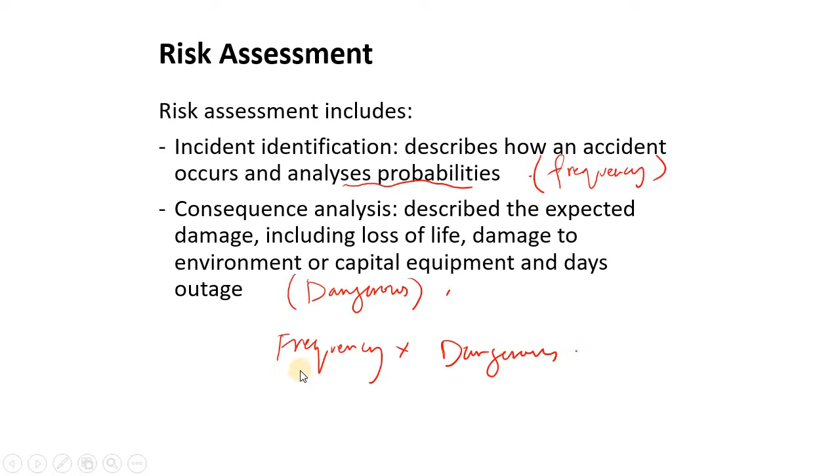It happens every day, and it is very dangerous—that is something severe that we never want. But for example, it happens once every year, but it is very dangerous—of course this will still be a risk, but not as high as if it happens every day. Now if it happens every 10 years and it's very dangerous, that puts the risk really very low because it happens every 10 years. Now if you say it happens every 100 years, forget about it, right?

So the thing is that the frequency will increase the risk if it happens every now and then. So every now and then, if it happens, it's very risky.

What about the dangerous part? It may happen every day, but it is not risky at all—not dangerous at all, which means we maybe don't need a design for that to be inherently safe, but we just deal with it. So I just said it's not that risky, because it's not dangerous at all, even if it happens every day.

Now if it happens every hour, will this be accepted or not? Now if it happens every minute—I know this is crazy, but what I'm trying to say is when I say it's dangerous and I increase the frequency, it becomes dangerous in this case. So this is the risk, where you multiply the frequency by the consequences, how dangerous it is. The frequency tells you how much it happens per certain time.

And if you have a high risk, you will say, for example, it is in category A, where it is unacceptable, then category B, where it is critical, and then serious, marginal, negligible. These categories differ from place to place, so it always depends on what place you're talking about. A university is different from an industry, and different from my shop that sells hamburgers. So everyone has its own different risks.

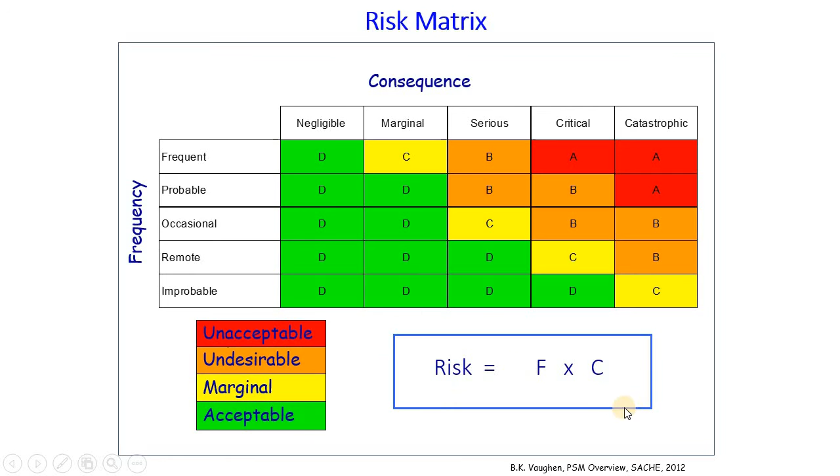We are going to add something. Usually you will not find this in many places, because they consider this as one—they more concentrate on frequency versus consequences. But operational discipline is something you're adding: if you have bad safety precaution, no good management for safety, no procedures, you're putting this down, and this just increases the risk. But if you have good procedures, really very good procedures, to deal with everything you have, right?

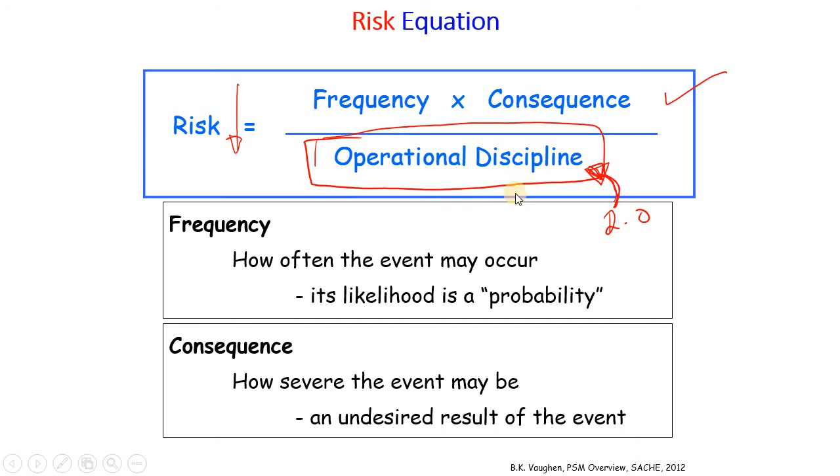So what will happen here is the risk will go down. That is the operation disciplines. How much are you ready for those risks? How much do you have in system, management wise, procedures, and even the instruments, the sensors, the safety precautions, and so on. So what is the operational discipline?

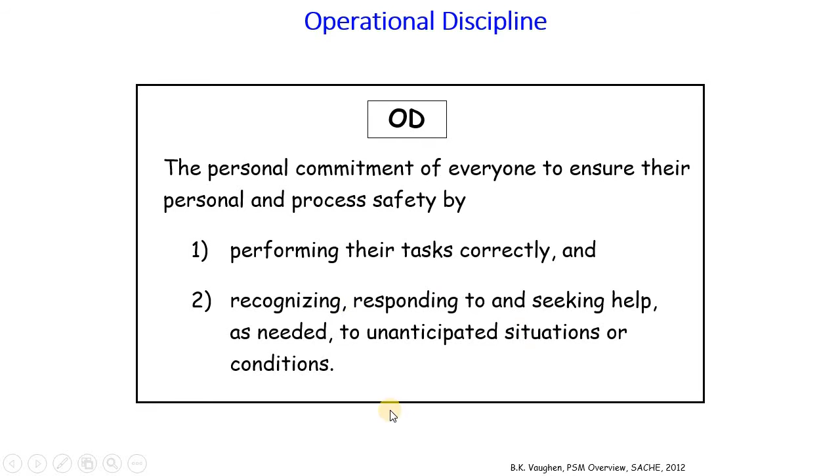The personal commitment of everyone to ensure their personal and process safety by performing their tasks, so everyone knows his task or her task, recognizing and responding to and seeking help for unanticipated situations, so they know what to do when they have some kind of situation or condition. Sometimes operational discipline is also reflected as a leadership focus, employee involvement, practice consistent with procedures, excellent housekeeping, awareness, knowledge, and commitment at the personal level.

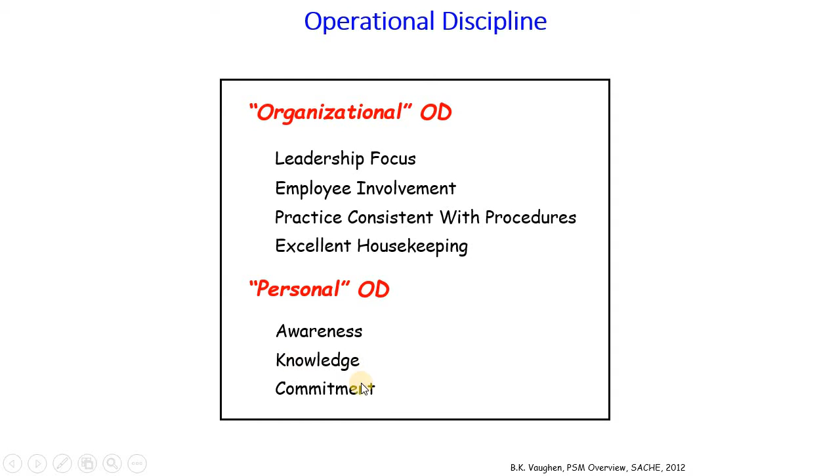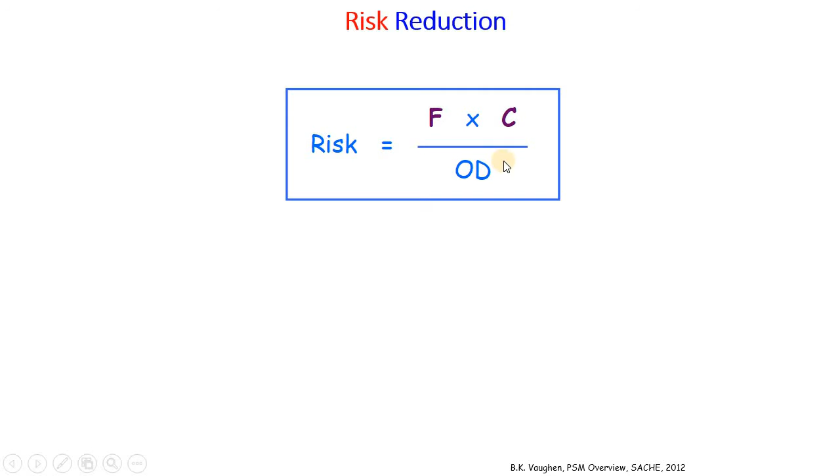So that is at the organization personal level. I think you got an idea about OD. Of course, if you ask me what is the value of OD, always keep it as one, because it's very difficult to identify that. Only if you have in your industry something you can identify, the value of OD is going to be different. We already explained part of that, and this is where I explained that if operational discipline goes low, the risk goes high.

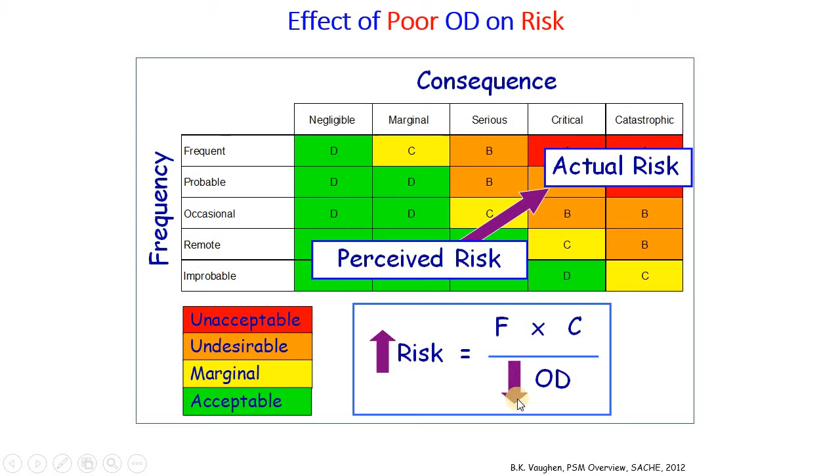So that is the equation, the equation that we have in our PSM, process safety management. They compare the risk reduction efforts and evaluate them against potential business risks. The risks we are talking about here could be environmental, operational, maintenance, quality, and financial. So there are many kinds of risks, not only risks to a person.

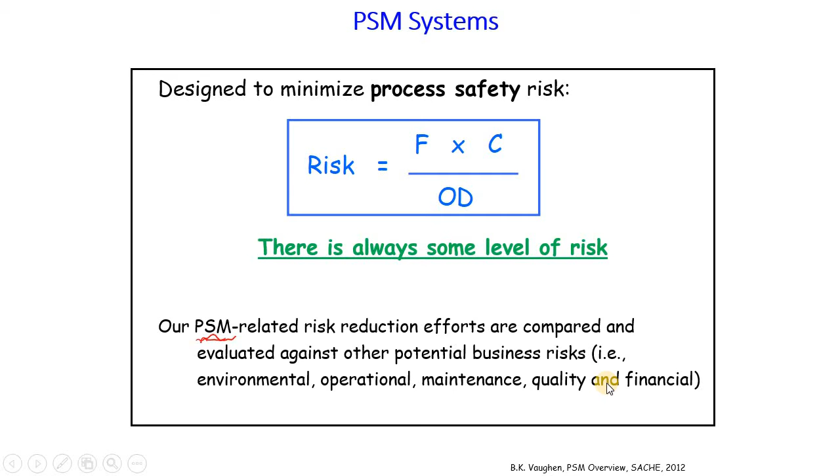And if you go to the process safety management standard and read about it, you're going to see the different risks that are incorporated in that standard. So that was the first part, just to get an idea about what is risk and how to calculate this. Now getting to a different view of it.

What I had explained was something very generic. Well, if you go to industries, there are more detailed definitions in this regard, and one definition used in industry is called reliability. There have been studies, master's studies, that talk about reliability and how reliable an industry is. So you can go to a certain unit in the plant and calculate the reliability. So what is reliability?

It depends on the probability. That's where it concentrates. So what is it? Let me go more into details. Equipment failures or faults in a process occur as a result of a complex interaction of the individual components.

So what I'm talking about is failures. How much does this happen? Does it happen every year? How many equipment failures do I have? For example, I'm talking about valves, how many failures will I have per year for valves. What about compressors? How many failures will I have in my compressors per year?

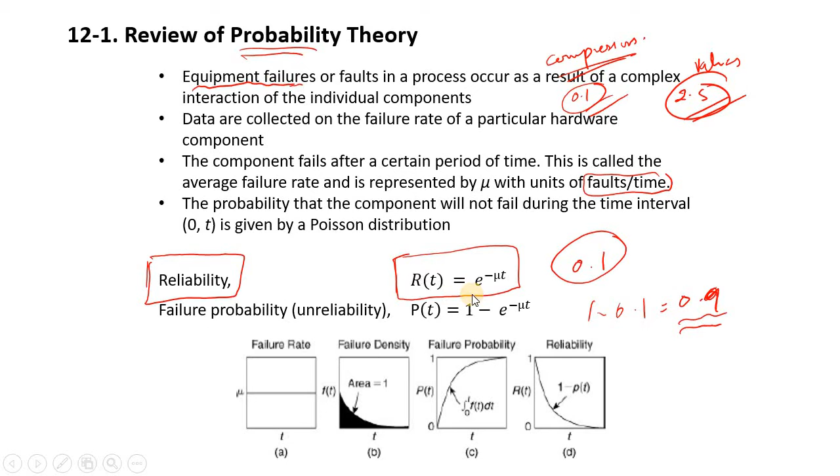So if failure probability is 0.5, that's 50%. That is the meaning of failure probability. Reliability and failure probability are opposites of each other. So this is how we calculate: all we need is mu. We calculate reliability, and from reliability we can calculate the failure probability.

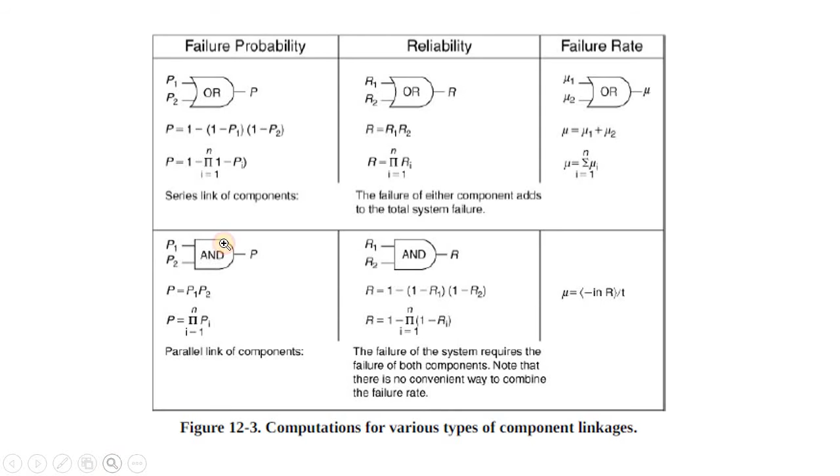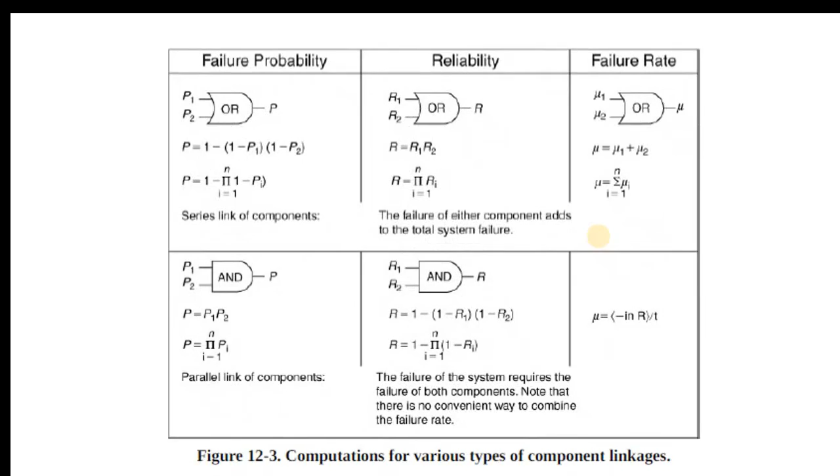Now it can get complex. In this case I'm just showing you the complex cases that we have. This table you always need to keep in front of you, because it's going to be very supportive when you try to solve problems in this chapter. Well, what do we have here?

If we have—this is the failure probability first, which is P, right? This is P, and here's also P. Here's the reliability, which is R, and here's the failure rate, which is mu. So if I start with the failure rate, mu, how many times per year? If I have two failure rates, this could fail, and that could fail as well.

For example, you have two valves redundant to each other. So it could be this and this, or that. And since we have this failure rate, if you have something redundant, you're going to add them. Maybe not redundancy—more than that, you have, for example, a valve, or you have also an alarm system here. So this could fail and this could fail.

Now this or this, they are independent of each other, but the total mu will be mu1 plus mu2. So you add the failure rates that you have.

However, if you have the AND, in which both of them could happen together, they are very much related. There's a different equation in which you can calculate mu, which is minus ln R divided by T.

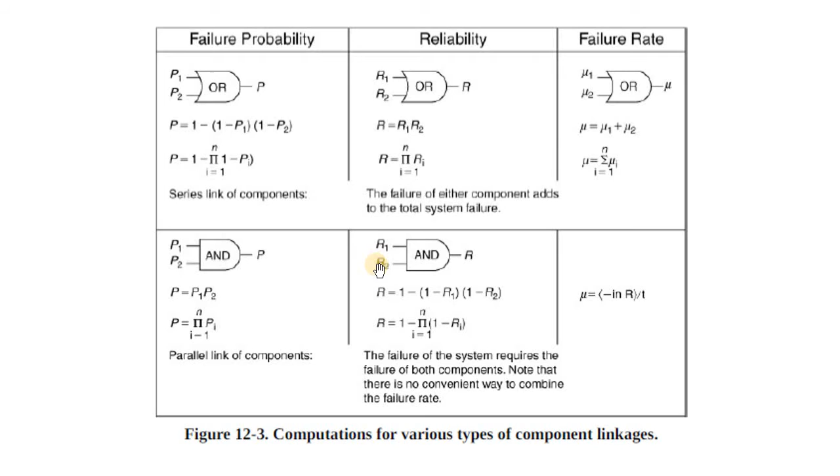I don't know if you recall from probabilities where you add them or multiply them. It all depends if they are dependent or independent of each other. Note that there's no convenient way to combine the failure rate. So what we're trying to say here is that if we have things in series or in parallel, we can calculate the failure rate, the reliability, and the failure probability.

Just to know the values of mu that we have, which are faults per year. So these are how many faults per year we have. Just to get an idea, we need a comparison here.

So control valves is 0.6 faults per year. We are talking about every 2 years you're going to have about 1 fault. For control valves, every 2 years you're going to have 0.6 and 0.6, so that's 1.2 - you're going to have 1. So this is what you're going to say: wow, every 2 years I'm going to have only one fault. Yes, but if you have 1,000 control valves...

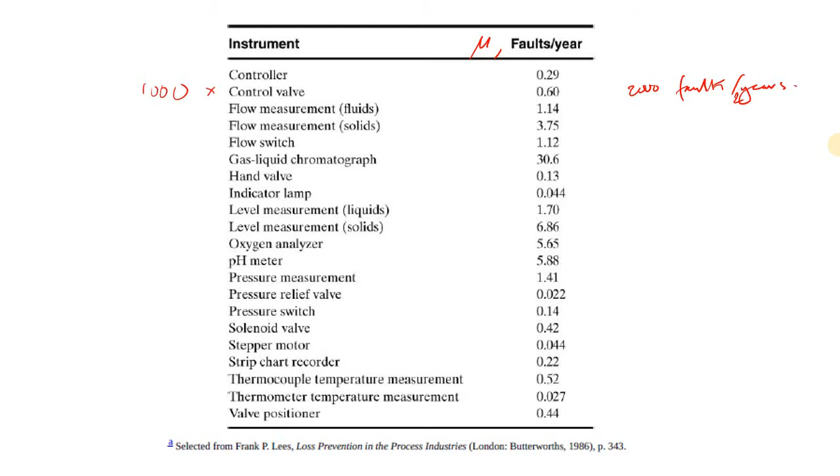Now how many faults are you going to have per year? Oh my God, now I'm going to have 2,000 faults per 2 years, and that is about 1,000 faults per year. So I'm going to have every year 1,000. And now if you think about 1,000 per year, your head is going to click and say oh my God, that's too much. Why is it becoming too much? Because if you think about it per day, divided by 365, you're talking about having a fault in a control valve every day. So this is when you start putting things into numbers, you find out that it may become much more complicated.

Okay, let me get that. So again, sorry for that. So what do we have here? We also want to compare the flow measurements for fluids and flow measurements for solids. If you have a flow of solids, you always have failure much higher than with a fluid. Why? Fluid is much more smooth. This one blocks and causes some problems.

A gas liquid chromatography, we always have - I don't know if you dealt with that, but I dealt with it, and it's crazy. If you have a chromatography at your lab, you see how many faults per year - it's 30.6 faults per year. So you're talking about every 10 days you're having a fault. And that is true, we always have a problem and call the technician. The technician comes - what problem do you have? I just fixed it 1 or 2 weeks ago. It's written there that these are the numbers of faults per year.

We are expecting to get something like that in our life. So they are very important, but they have a lot of faults and so on. There are things which have much fewer faults, like the pressure relief valve, because it is the least in contact with our process, system, or chemicals, and that is why it has the least of it.

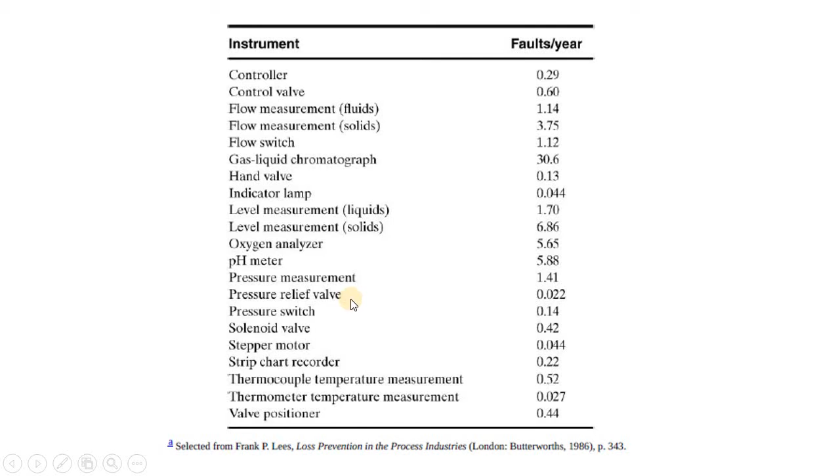Just to take an example, so this is like an example. Both systems demonstrate unrevealed failures. For the alarm system, I just went for the solution. So this is example 12.3. Let's go to example 12.3 and find out the problem.

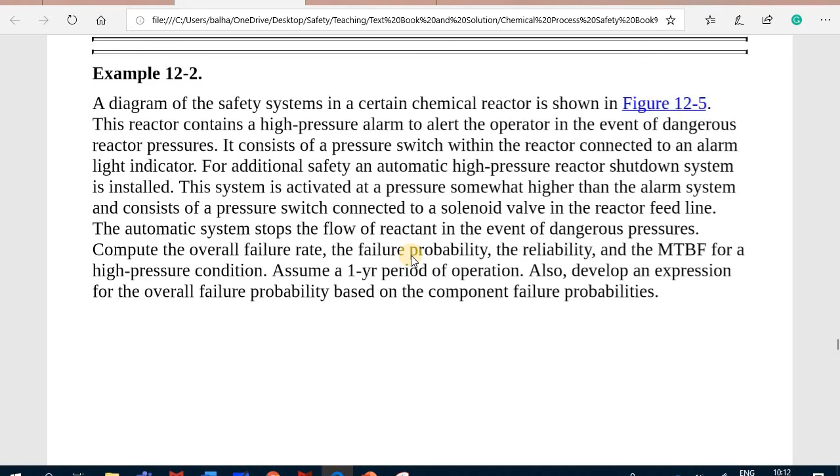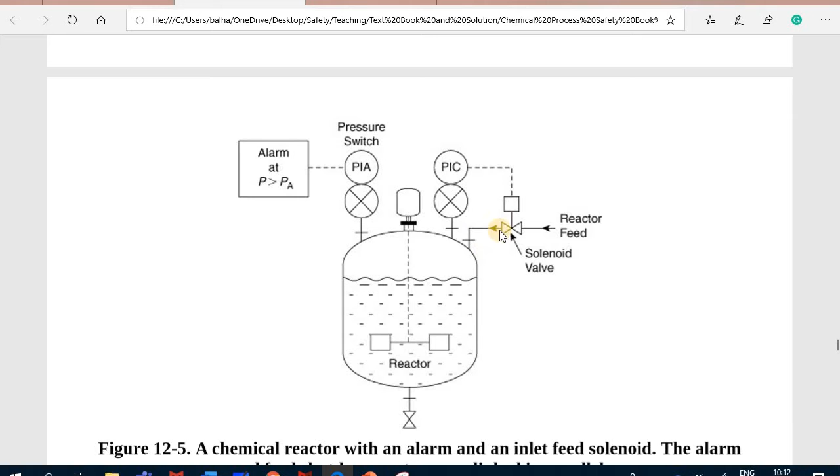But before we get to example 12.3, there's one problem I think is good to solve first, which is example 12.2. In this case, what do we have? We have a diagram, and this is the diagram that we have where it's just a reactor. We have a stirrer, of course a chemical reaction, and we have some kind of a switch here, written A. We have an alarm set at a certain pressure value. We have a pressure controller here, an indicator of course, and a controller, and we have a solenoid valve sitting here. So what is the reliability of the system that we have here?

Okay, so this reactor contains a high pressure alarm to alert the operator if we have any dangerous thing, and of course we have a pressure switch, and as we said, we have an alarm light indicator. On the other side, for additional safety, an automatic high pressure reactor shutdown system is installed.

This system is activated at a pressure somewhere higher than the alarm system and consists of a pressure switch connected to a solenoid valve in the reactor feed line. The automatic system stops the flow of reactant if there's any dangerous pressure.

Compute the overall failure rate, the failure probability, the reliability. So we want mu, then we want P, and then we want R. And then the mean time between failures. We did not take them, but that's simple.

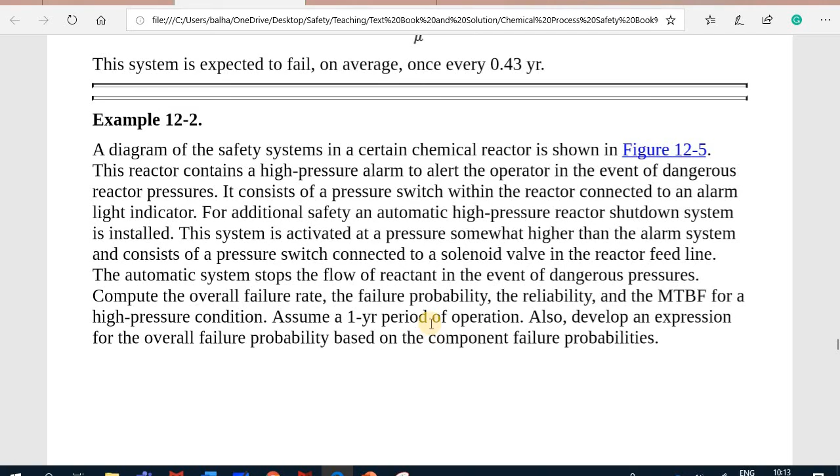We are going to assume, by the problem here, 1 year of operation. So what do we have here? This is what we have. Now we are going to include our switch alarm and the switch for the controller here, and the solenoid valve. So this is what we have: pressure switch 1, alarm indicator, pressure switch 2, solenoid valve.

From the table, we're going to see that for switches, this is the faults per year. For alarms, this is the faults per year. And for solenoid valves, these are the faults per year. So these are the faults.

To calculate the reliability, we just take the exponential term and calculate the reliability of each one. Here you can see which one is more reliable. For example, the alarm indicator is more reliable than the rest because it has less faults per year, less mu. Now if you want to calculate the failure probability, which is the other way of looking at it, we just subtract by 1, and you're going to see the one with the least failure probability. So this is 0.04, giving you the idea that has the least failure probability.

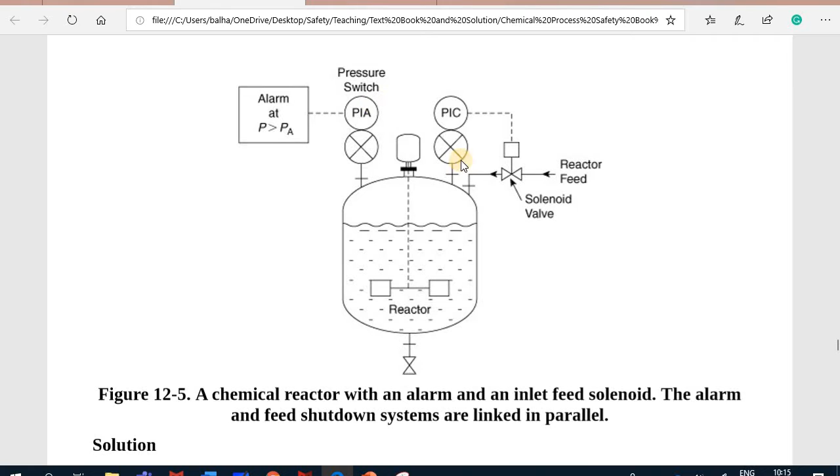Now I want to look at the system as a whole. What is the reliability of that system? What do we have here? You can see that these things are in series, these two are in series, but this is in parallel with that. So these two are parallel.

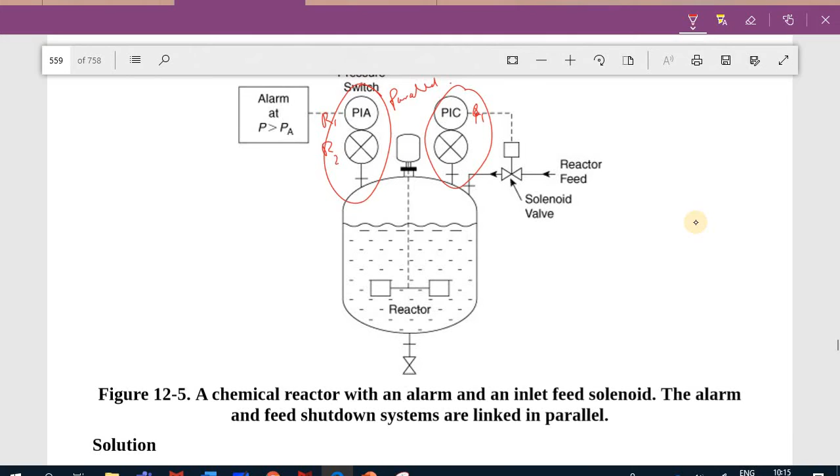In this case, I'm going to calculate the R for each one and then multiply them. After I get the reliability of these two systems here, because they are in parallel, I need to go to the AND/OR system, and this is equal to 1 minus R3 into 1 minus R4. So something like that if they are in parallel.

So this is what we'll try to do. The first thing we are going to start with, because they are in series and it's written here, these two components are in parallel. The two components, I mean on the right and the left. For the alarm system, the components are in series.

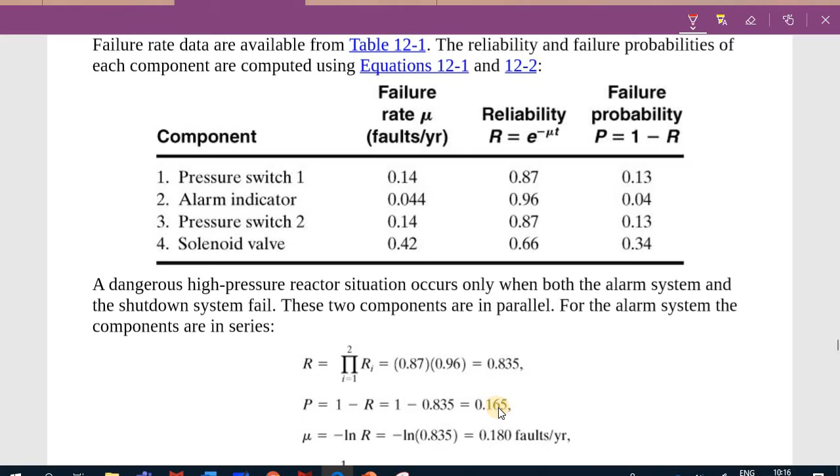So R is equal to 0.87 to 0.96. You multiply 0.87 to 0.96 and you get the value. The failure probability is 1 minus R, that's the answer. And mu is minus ln R. We can calculate how many faults per year for the total, if they are in series. And what is the mean time between failures? You just divide: 1 divided by mu gives you the mean time between failures. So from one failure to another failure, it is 5.56.

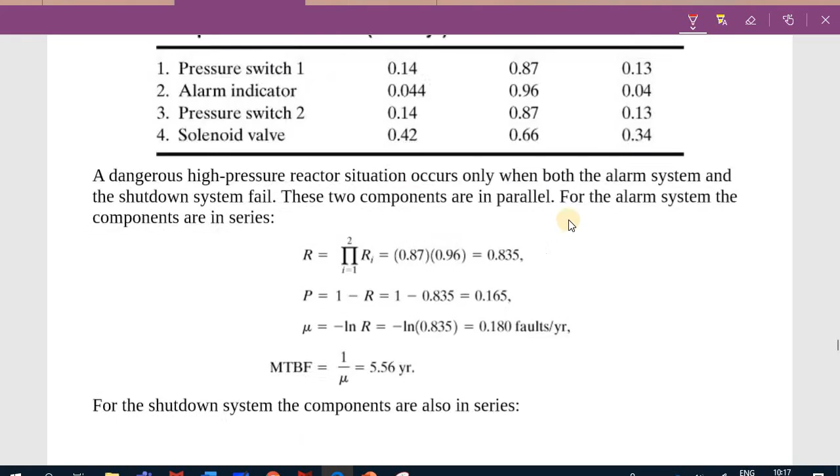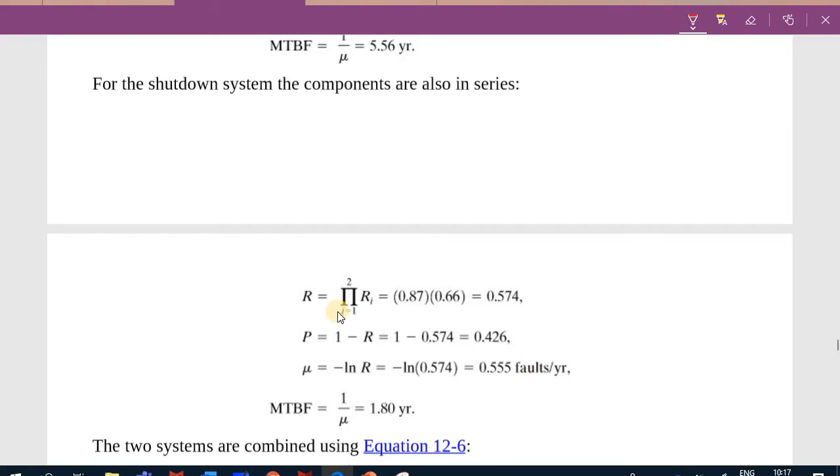Now for the shutdown system, which comes into being if that thing is not working, I mean if it happens that it could not withstand what is happening. Again we multiply them, they are in series, the solenoid valve and the pressure switch. So you multiply 0.87 into 0.66, then subtract from 1 to get the failure probability, and get mu, which is minus ln R because they're in series, and you get the mean time between failures.

Now the two systems are in parallel. So we're going to go to the P part because it's easier, and we just multiply them because they are in parallel, and we get 0.07. By that we can calculate the reliability, which is 0.93, and you can see that is really good - 0.93 reliability is really good. If you want to calculate the failure rate, which is minus ln R, in the case that they are in parallel, you're going to get 0.073 faults per year.

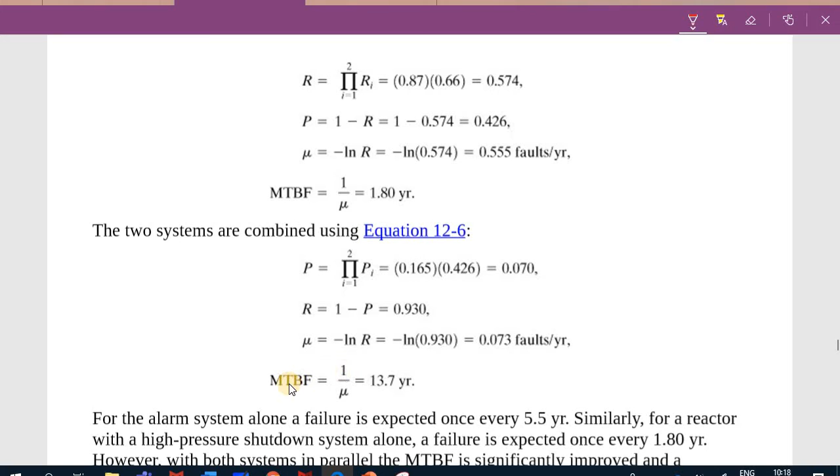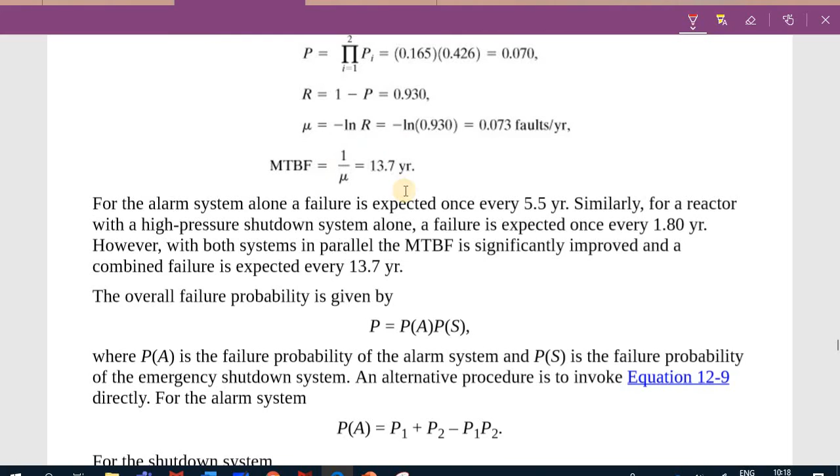I can't understand this in years, so I need to calculate the mean time between failures, and I get 13.7 years. Now I understand that one fault will happen every 13.7 years. It's beautiful to look at, and it's nice to calculate these numbers. It gives you more confidence in terms of numbers that things will happen or will not happen.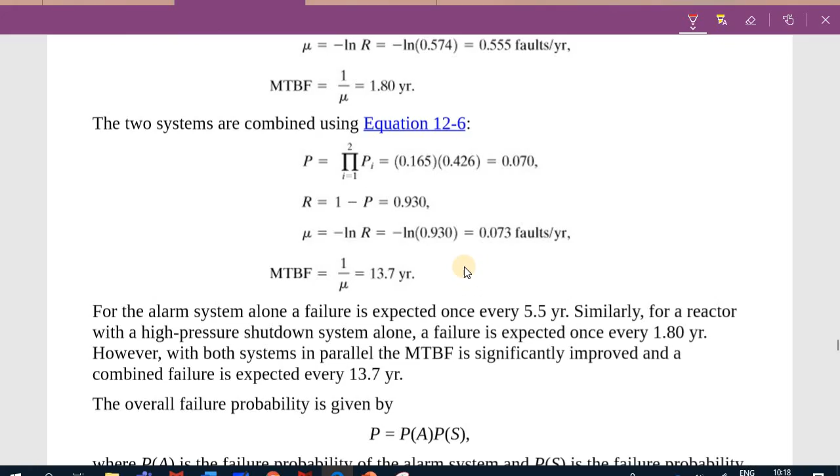Okay, so that was 12.3. I saw that was 12.2. Now going down to 12.3. There are more equations here, but I did not take these, don't worry about them now. Was it 12.3? I think I solved 12.2. That was what meant to be then. I just solved 12.2, which is the example we wanted to solve, because this other part that I will not cover talks about availability and unavailability for both the alarm and the shutdown system. There's something called availability and unavailability, but I did not take that, just to keep things easier for you. I decided I will not cover that. So here I think we meant example 12.2 rather than example 12.1.

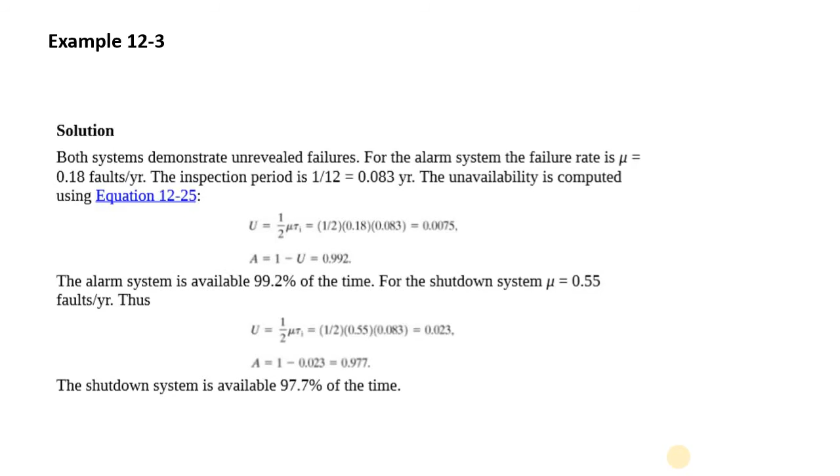So going to the next section, after knowing the failures and probabilities, we have the event tree. It's another way to know where we have high risk and where we have a high frequency of what you're trying to see. The way we see event trees, it comes from the words 'tree' and 'events' - there's an event, but it's like one event is a consequence of another event. So it's a series of events, one event after another.

Event trees begin with an initiating event, which starts everything, and then it works towards a final result. You can also go backwards - if you have the final result, you go back to the initiating event. Imagine you do this by hand and you already know what final result you will achieve if you have the event trees of many initiating events. So it's something you do as an assessment to assess where your risks are. This approach is inductive, so you do it beforehand.

The method provides information on how a failure can occur and the probability of occurrence. We want to know how a failure can occur by knowing the events of that. So the typical steps of any event tree analysis: identify the event, what is the initiating event, where it starts. Then, what are the safety functions? We identify them, designed to deal with this event. We construct the event tree, and then we describe the resulting accident event sequences - what are the accidents that could happen?

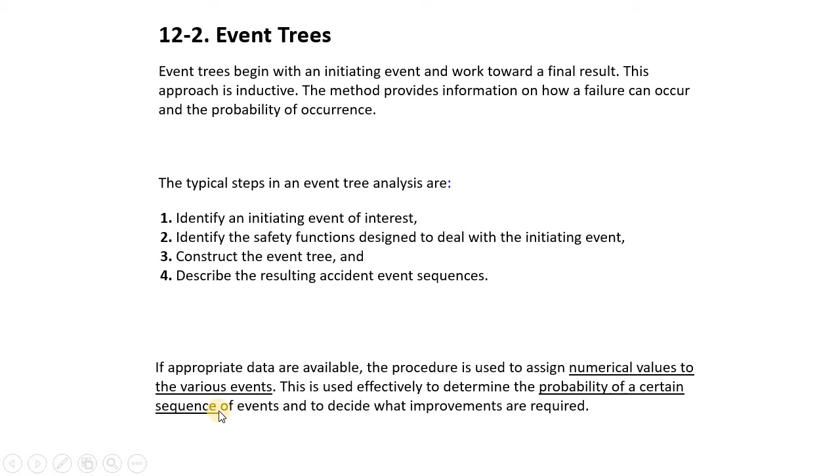So what do we need? If we have data, the procedure is used to assign numerical values to the events. You put numerical values, and we're going to see that in a moment. This is used effectively to determine the probability of a certain sequence of events. So an example here, we directly go to an example, 12.8.

So that is the example we have here, 12.8. We already know this example, we've gone through it many times. A reactor, we have cooling, and water going outside. In this case, what do we have? We have a temperature controller, and it has an alarm as well. We have a temperature controller to make sure that if your temperature goes up because of the exothermic reaction, you're going to have more cooling water in. So what do we have? A high temperature alarm has been installed to warn the operator of high temperature within the reactor.

The event tree, now we want to start with the initiating event. The event tree for a loss of coolant initiating event is shown in figure 12.9. So we have no cooling for some reason. Four safety functions are identified, written across the top of the sheet. Here it explains what is happening. The first safety function is the high temperature alarm, because the temperature is going up.

The second safety function is the operator noticing that there is a high temperature alarm. The third safety function is the operator re-establishing the coolant flow - he's correcting the problem, so the operator is taking action. The final step is the operator performing an emergency shutdown. This is in case things did not go well, so the operator is taking another safety precaution, putting it in shutdown.

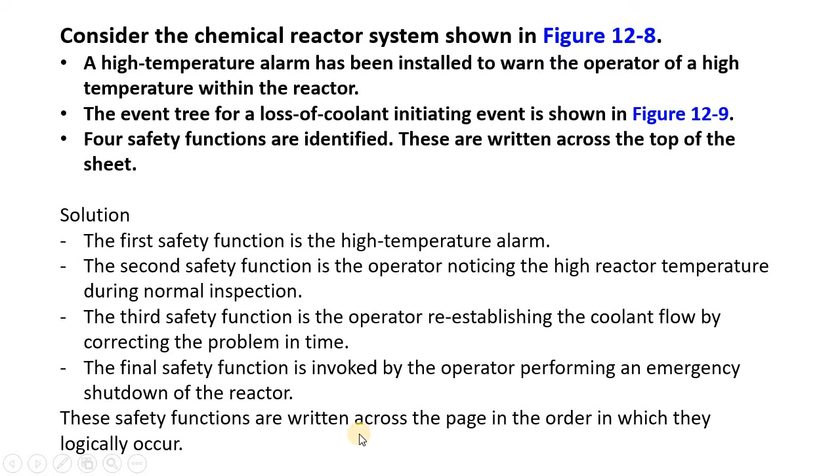So these are 4 safety steps that could be taken. When I know the 4 steps, I need to know the probabilities of those steps. So here are the probabilities. I'm going to calculate the failure rates, or the occurrence rates, and it's written here.

The event tree can use quantitative data available on the failure rates of the safety functions. So we need to know the failure rate. We can also know the occurrence rate, and know the opposite of that, which is the failure rate.

For example, a loss of cooling event occurs, and there are 4 steps. The first step, where the hardware safety function, which is the alarm, fails 1%. So we are going to assume that it fails only 1%. Sometimes we already know the failure rate, which maybe is 0.04. But in this case, we are going to say that the possibility that this alarm will fail, telling us that they have a high temperature, is 0.01.

Now we go to the second part. So assume the operator will take action. But how many times will he take action if there is an alarm? We are assuming that in every 4 times he takes action 3 times. So one time he just misses that out. 3 out of 4 he's going to be taking action, and this sounds good, because above 70% usually the operator is attentive. More than 90%, this is usually not applicable.

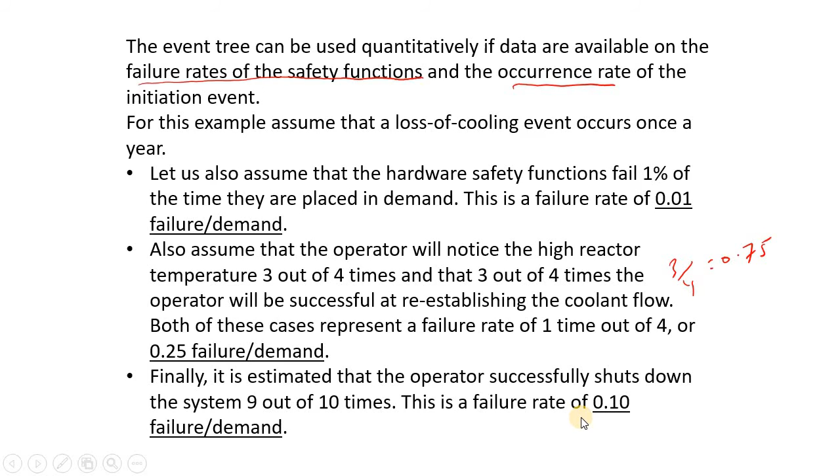So what do we have here? Let's go and look into the details of it. That is the tree diagram. So what do we have? We have a high temperature alarm alert operator. We already said that this is 0.01, if you can recall. It was 1%, that alarm will only fail 1%.

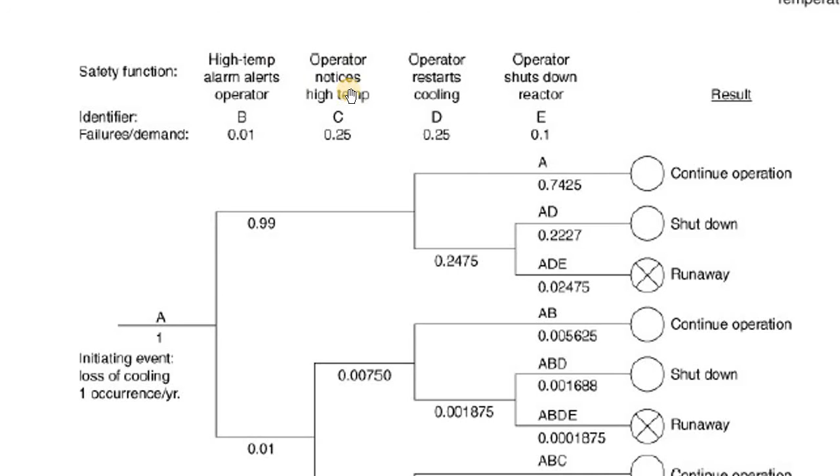The operator will notice the high temperature, 25% failure. The operator restarts the cooling and fixes the cooling rate, 25% failure, which is 3 out of 4. Shuts down, 90% good, but 10% failure. Or you could call it that it will not occur, he's not going to do that.

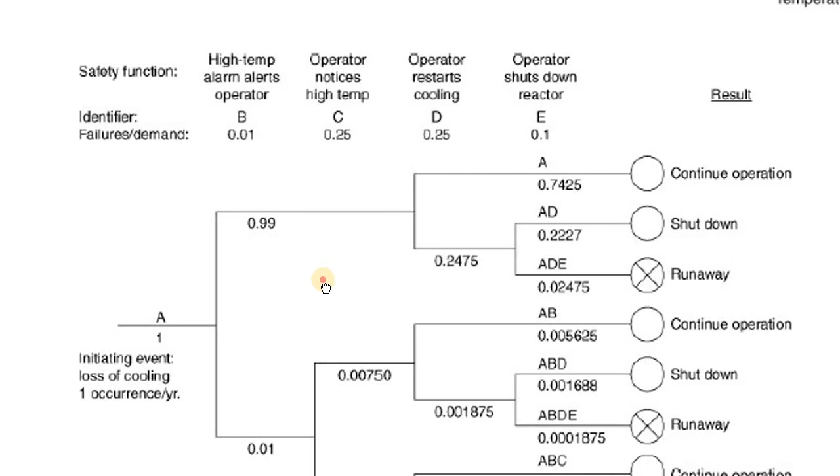So we have 0.01, 0.25, 0.25, 0.1. So what do we have here? We have an initiating event, which is the loss of cooling, which is once per year. What will happen if we have loss of cooling?

So we are going to start with this, saying that we have a high alarm operation here, which is 0.99 and 0.01. 1% it will fail, and 0.99 that it will not fail, meaning that the top line is the success one, the bottom line is the failure one. If you continue, this is the success, this is the failure. If you go here, this is the success, this is the failure. We have success, we need to stop here for failure, but this doesn't count because things are in success, so there is no shutdown, it will go just straight on.

So there's no safety precaution here. But in this case, there's a possibility that if he restarts cooling, this could fail, and if it fails, it goes like that.

The A, D, E are labeled this way: A is initiating, D is not cooling, and E is shutdown. So this ADE event is A, D. This is D, it starts from here, and E starts that way. So that is the A, D, E.

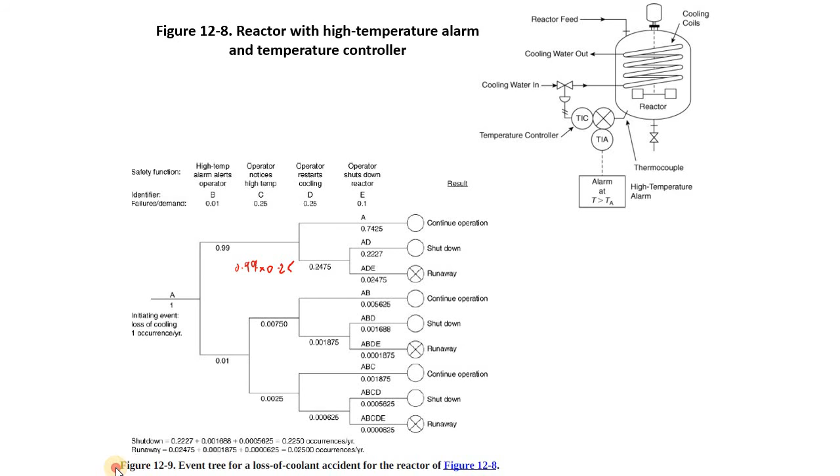So that number we have is 0.99. So this is 0.99 multiplied by 0.25. Let's zoom in. So that is 0.99 to 0.25, which is 0.2475. The rest is the success, where you continue operation.

Now, if the operator restarts the cooling and still things fail, that means you need to multiply it by 0.1, so it becomes 0.02475. And the rest, which is 0.2475 minus this number, is 0.2227, where it goes to shutdown.

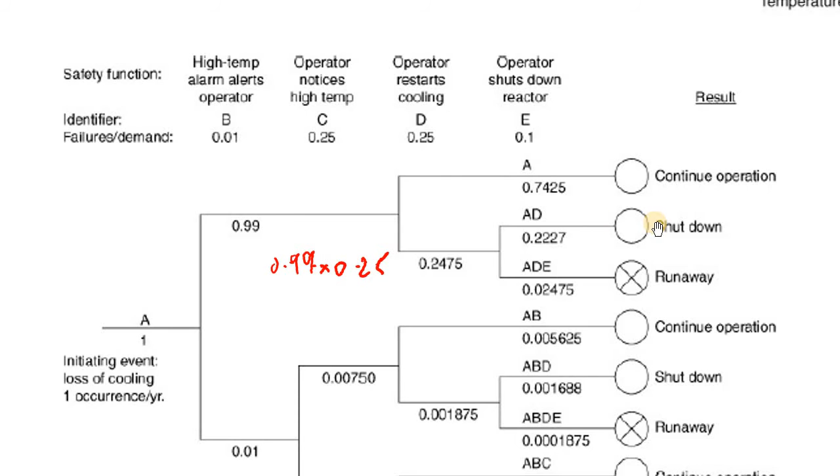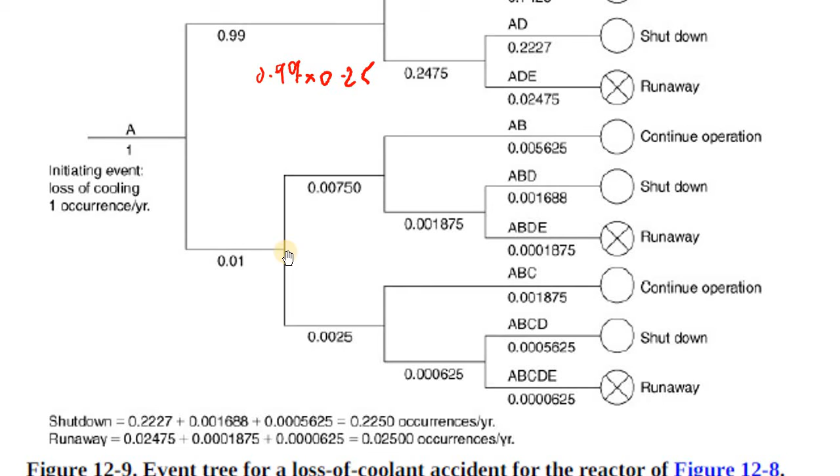So let's take something else, where this is the initial thing: if the alarm fails, it's 0.01. Now if it fails, what if the operator does not notice the high temperature? So as another failure, it's 0.25, this 0.25 multiplied by 0.01 gives you 0.0025. If the operator also fails to restart the cooling, you're talking about 0.25 multiplied by 0.0025, you get 0.000625.

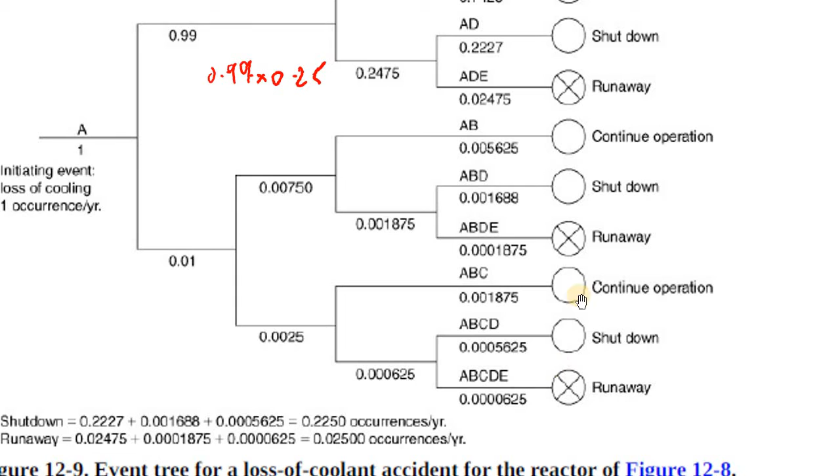Now, if the operator also fails to shut down, this is like impossible, right? And this is why you have a very low number. So you multiply the failure, which is 0.1 here, into this 0.000625, you get this number here. Of course, if it fails, things are bad, so this X means that this is bad, and this is like a success, which is just without an X.

Now, if I want to calculate all the shutdown numbers, the shutdown here and here, we will see that the probability of having shutdowns is 0.225 occurrences per year. So every 4 years I'm going to have one shutdown, and that is the usual case if you think of it in real life.

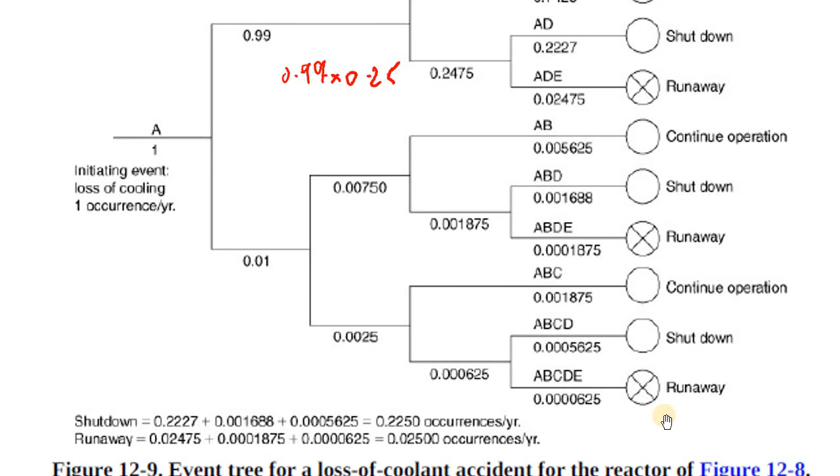Okay, and 100 years is only 2 times. Do you imagine that 100 years? It's more than the life operation of that plant. You already have a shutdown as well. So you can already see that we are saying it will never go to runaway.

That was the way of how to do your event trees. I know it was a little confusing because you have a lot of numbers here and there. There are some assumptions that we also need to include in our problem, and this is what sometimes makes you think this is difficult. It's not difficult, you need to understand the process.

But talking about the numbers, how many faults per year, what are the assumptions, consider going back to your experience when you go to the industry, or it will be given to you if you're a student, so you're going to have these numbers. Things that are very obvious, which you can get from tables for alarms, for valves, this may not be given to you because you can get them from the tables. I know they're not really much related because they are faults per year in the table, but you still can use them.

Fault trees, so now we are going to go to fault trees. It is more like an inductive method, rather not, a deductive method. So you're not getting into something and seeing what is happening. Fault trees actually came from the aerospace industry, where it was used very extensively by the nuclear power industry to qualify and quantify the hazards and risks associated with nuclear power plants.

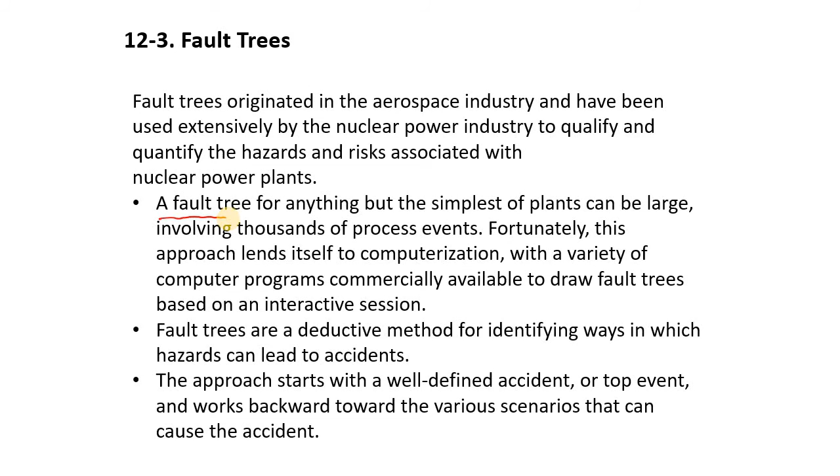A fault tree for anything but the simplest of plants can be really large. So we are saying a fault tree is a very large thing. Even for the simplest plants it's still very large, because it will have thousands of events, and because of that we use computers to do that. So we cannot really do it by hand. It's just a learning process where you do it by hand, but things are then put into the computer because there are a lot of numbers and probabilities. It's very confusing, and you're going to have a lot of human error doing that, and it takes just a lot of time.

So fault trees are deductive, for identifying ways in which hazards can lead to accidents. Now we are not going through the series or sequence of events, we are talking about expecting what the accidents are. I'm going the other way around, sorry. It's more deductive, how the hazards can lead to the accidents, okay, and then I can go backward. This approach starts with a well-defined accident or top event and works backward towards the scenario.

It's something like the what-if, but not quite, because what-if asks what if the pressure goes up. No, it's like this: the temperature in the reactor, the reaction in the reactor runs away. We have a runaway reaction. Why? Then you put the reasons, and for each reason you ask why again, and you get more reasons for every part. The runaway reaction happens because you have a runaway reaction in this system. Why? Because the cooling stopped. The cooling stopped maybe because the pump is not working. The pump is not working because of, and so on. So you can see the way we are trying to look at things.

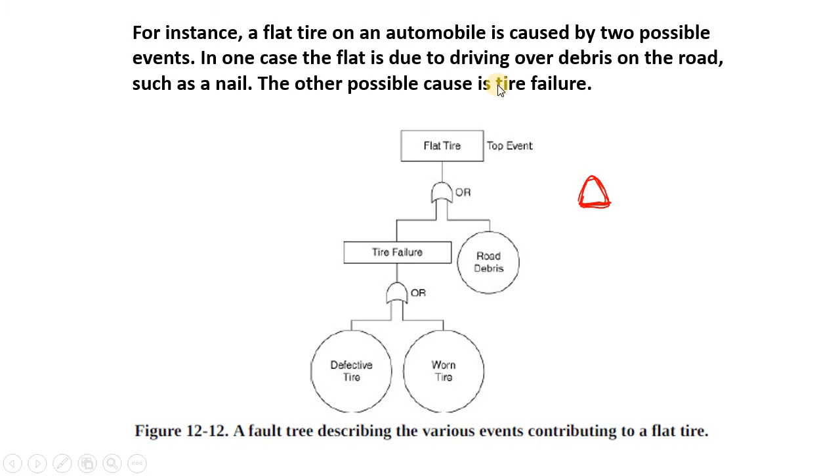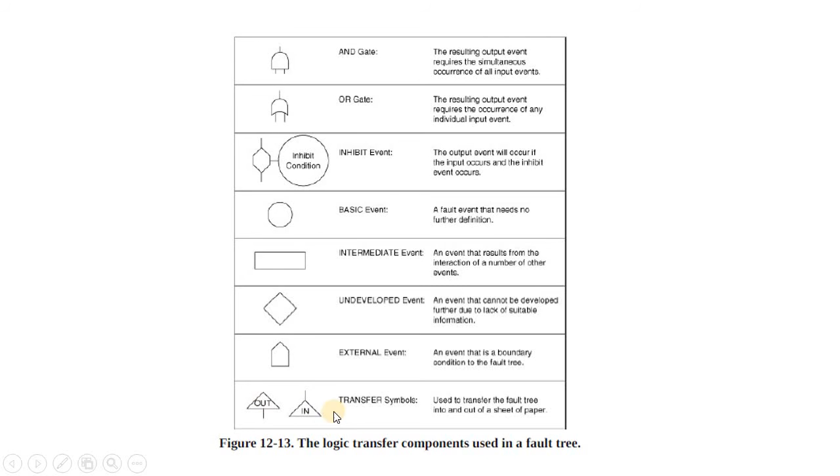Sometimes you have external events coming into being. That is an event that is a boundary condition to the fault tree. And sometimes you need to go to another paper because you don't have space on your paper, so you put these kind of connections for yourself. And that was the way of the fault tree.

There are lots of calculations in fault tree. We are not going to go into the details of the fault tree because it needs a computer to solve, and it's very, very confusing. But we need to understand how to build those fault trees. So not towards the numbers, but we need to go through the concept.

So for example, before the actual fault tree is drawn, there are a number of steps we need to do. Okay, so what are the things that we need to do before we draw it? First, we need to define very clearly what is the top event. The top event is the flat tire, or for example, high reactor temperature, or the liquid is too high. So that is the first thing, or the explosion of the reactor, fire in a process.

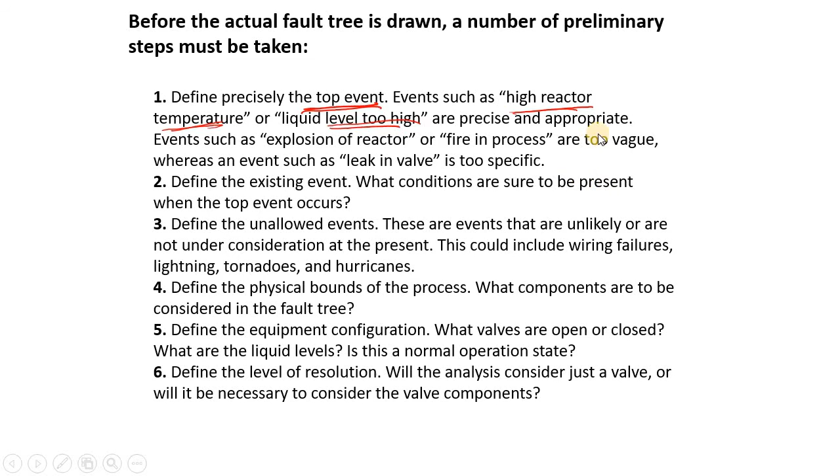But explosion of reactor, fire in process are usually too vague. So it's not very specific, because there are a huge number of detailed events that I should mention for why this reaction, the explosion of the reactor, happened.

Okay, so the second step, after knowing what's the top event, we define the existing event. So what conditions are sure to be present when the top event occurs? Okay, so for this to happen, what should have happened? Why did it happen? And then we define the unallowed events, so things that we are expecting or we don't expect. But the existing events, we are going to include them.

But sometimes we don't want to include them, so we write them on the side. What are the unallowed events? For example, events that are unlikely or not under consideration at present - things like wiring failures. You don't want to mention wiring failures because that could be like hundreds of reasons that take us nowhere. Or lightning, tornadoes, hurricanes - these things are crazy if you try to include them.

This could have happened - now you're studying. It's not that it had happened. Okay, you're studying why the high reactor temperature went high, because we would expect that we will have a tornado one day. So it's like you're saying that one of the reasons we could have a tornado - why could we have a tornado? Oh my God, because I don't know what. So imagine if you go through these details, it doesn't work through fault tree analysis.

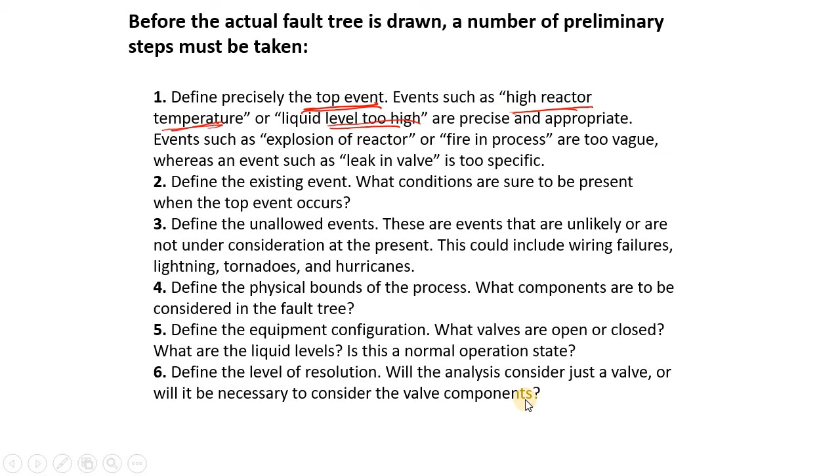Are we talking now more about the valve or the valve components? Just to know where to concentrate.

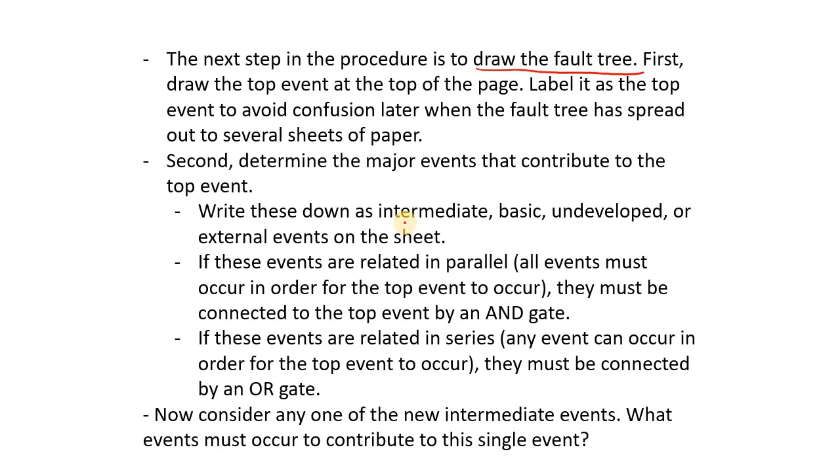After that, you're going to start and draw your fault tree. You put your basic events, the circle ones, the intermediate events, and gates. It could be happening in parallel, or they could be happening together, both events happening together for that failure to occur, and so on.

So an example here for 12.5: consider again the alarm indicator and emergency shutdown system. It's the same example, so you already have it fresh in your head. Draw a fault tree for this system.

The first step is to define the problem. What is the top event? Damage to the reactor as a result of overpressuring. So we are talking about overpressure within the reactor, and this is why the alarm goes on.

But you already found that the reliability is high, right? The failure rate of those things we had was too low. But now let's go through your analysis, doing your tree of events to find what the fault is.

What are the events that could lead to your fault? What is the fault? Overpressure. So the existing event is the high process pressure. Unallowed events include failure of the mixer, electrical failures - because if you don't have good mixing, you could have more pressure, meaning more gases. Also maybe electrical failures, the control valve not working well, wiring failures, or the control valve not working well, tornadoes, hurricanes - these are unallowed events.

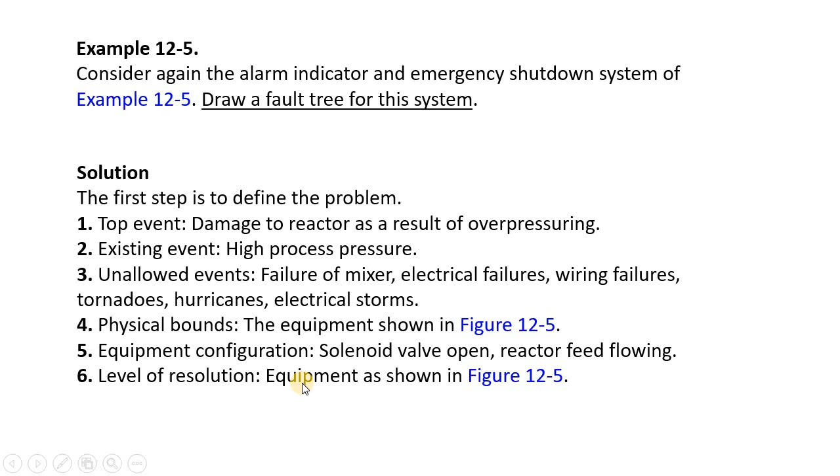Physical bounds - the equipment each has some bounds. Equipment configuration, we need to write them: we have alarm, solenoid valve, reactor feed flowing. Level of resolution - we are talking about the equipment, so my main concern is the equipment. I don't want to go and talk about the valve and forget about what I'm trying to address. Sometimes it happens that you talk with a person about a certain problem and then start discussing something else other than the problem, and you just get deviated away from finding a solution.

So what do we have? You have something like that. Overpressuring of the reactor - that's the top event. And these are the numbers we already obtained before: the probability, failure rate, and reliability.

We have an AND gate here, which means the overpressuring of the reactor will happen if the alarm fails and the emergency shutdown also fails. Because if this does not fail, the reactor will not go to overpressure - but it will go to overpressure if the alarm fails and the emergency shutdown fails. Now, why does the alarm fail?

It will fail for two reasons: if the pressure switch fails or the pressure indicator light fails. Sometimes the switch is working but the light is failing, so you don't know something is going on even though the switch is working. The shutdown will fail if the pressure switch 2 fails or the solenoid valve failure happens.

By this, we are getting the probability and reliability for each piece here, for each one of them. Rather than multiplying, for example, we multiplied 0.87 to 0.96 to get our number here. This R, if you can recall this - and then you're having these two in parallel, so you multiply the P's, this P multiplied by that P. I'm just trying to refresh your memory about what we have taken.

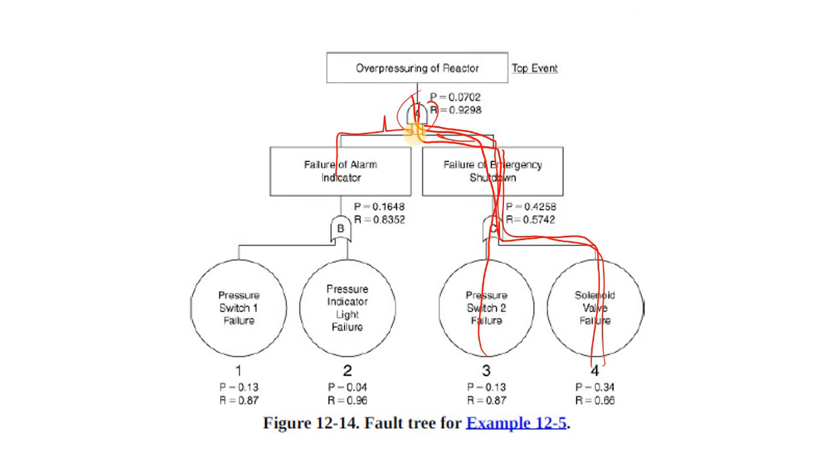The top event could happen through this line here, or through this line here, or this line here, or this line here - these are the possibilities. Well, I said this line here, but here we have an AND gate, so it's not only this - this needs to happen with this at the same time, so it's like both of them. So what do we have here? We are trying to determine the minimal cut set.

So once the fault tree has been fully drawn, we are putting in the computations that we need. So what are the different unique sets of events that lead to the top event? We are calculating now, and finally that is the solution. There's some details I need to mention, and I'll mention them very quickly.

Looking at example 12.6, the same example we just talked about, this is where you start building, saying it could happen because of A and B, and then we are replacing based on the details we have. For example, logic gate A has two inputs, one from B and the other from C. Because gate A is an AND gate, gate A is replaced by B and C - so you remove A and put B and C. Why did you remove A? Because this will happen because of B and C.

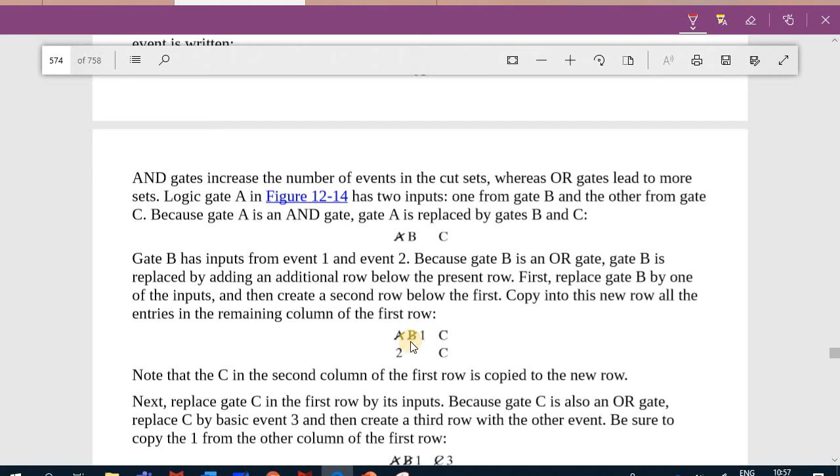So you have two columns here. Then you go to B - what will happen, when will B happen? B will happen if I have 1 or 2. Then C will happen if I have 3 or 4.

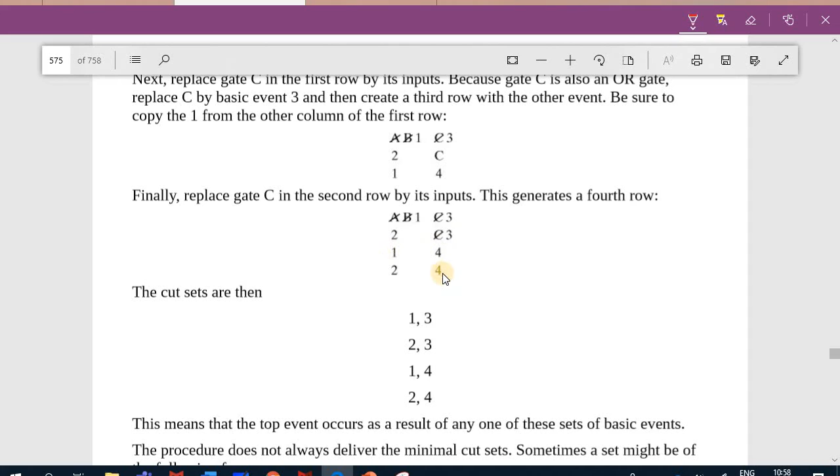Going through the details, finally we replace gate C in the second row by its inputs, and that generates the fourth row where we are talking about the possibilities - the cut sets that we have. We have 1, 3; and 2, 3; and 1, 4; and 2, 4. So these are all the possibilities that could occur.

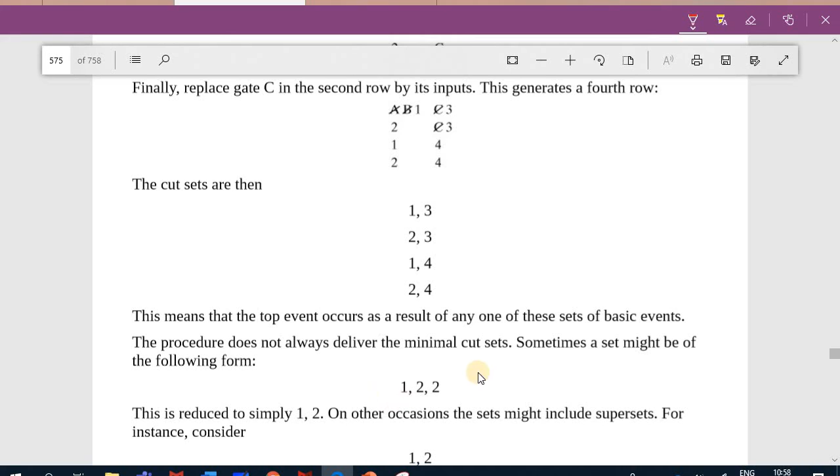Of course, sometimes it could be in a different form, like 1,2; 1,3; 3,4; and so on. So going back, these are the arrangements we have - the possibilities: 1,3; 2,3; 1,4; 2,4. These are the things that can happen: this and that happens, or this and that happens, or this and this happens, or this and that happens.

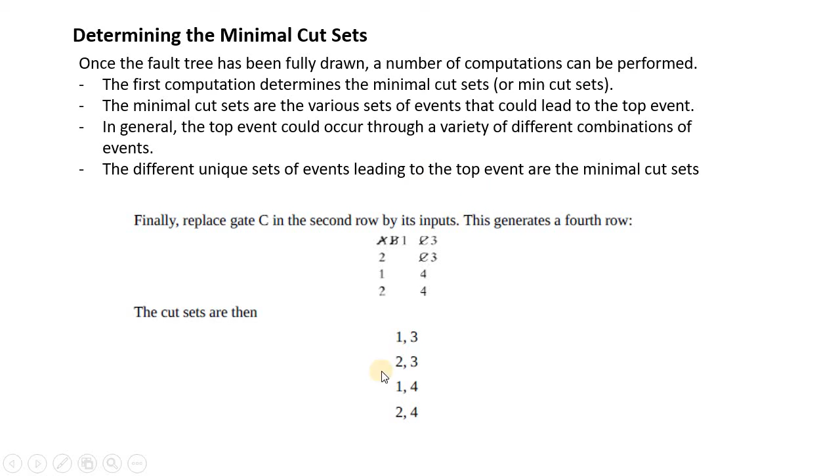And now, just by explaining this, I'm sure you have wires in your head getting tangled up with each other. So, not getting these wires tangled is enough for you to understand the concept of minimal cut sets, because we are not going to take problems into these details - it's computerized, and it's enough for you to understand the concept.

Now going to the final part of our chapter - those who studied process control from Seborg's book, I think chapter 10 or 11, cover this part where you have layers of protection to lower the frequency of a specific accident. So what is your protection? First, you have a design which is inherent safety, it's inherited. Then you have control systems to have everything in its place - temperature, pressure, level, everything is controlled. But if things go out of control, you have alarms and human interventions, where people see an alarm and take action to put things off and on.

If they don't take their intervention in place, then we have the safety instrumented functions getting into place, right? It automatically shuts down systems and so on. But before shutdowns, there could be some instrument functions, and then you have the relief devices, and if not, then you have the dikes.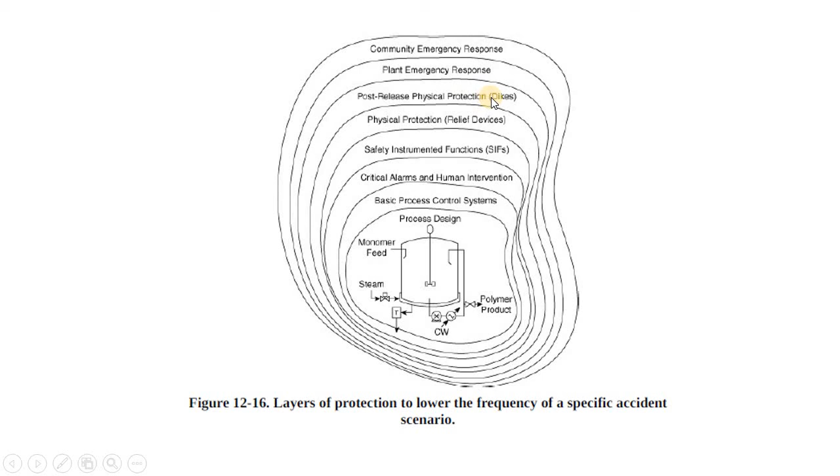It's like a physical protection to your system, just so you don't lose your equipment. If you lose all your liquid, it is contained within a big dike or hole, so you don't lose your liquid and don't have a lot of exposure to that liquid or those vapor exposures. And then you have your plant emergency response and community emergency response for the people around.

So these are different layers, and you need to have the idea of safety actions through all the layers. You identify a certain sequence and go with the scenario, starting with one event and another event, going through all the protection layers and putting all the probabilities on each layer. So you go from one place to another and look at the probabilities, the frequency, the consequences, and of course you will have the risk, whether it is acceptable or not, by looking at all the layers together.

These are just examples, for example frequency from literature per year. This is the frequency range for any pressure vessel residual failure. This is very specific - a certain failure in a pressure vessel, a certain piping leak failure per year. And these are the numbers that we have.

An example of a value chosen - now what does the LOPA do? LOPA just takes an average of these numbers. So instead of 10 to the power minus 5 to 10 to the power minus 7, it takes an average of 10 to the power minus 6. So LOPA is also a number, and as engineers we always try to use numbers just to quantify things, and then we look at the quality part of it.

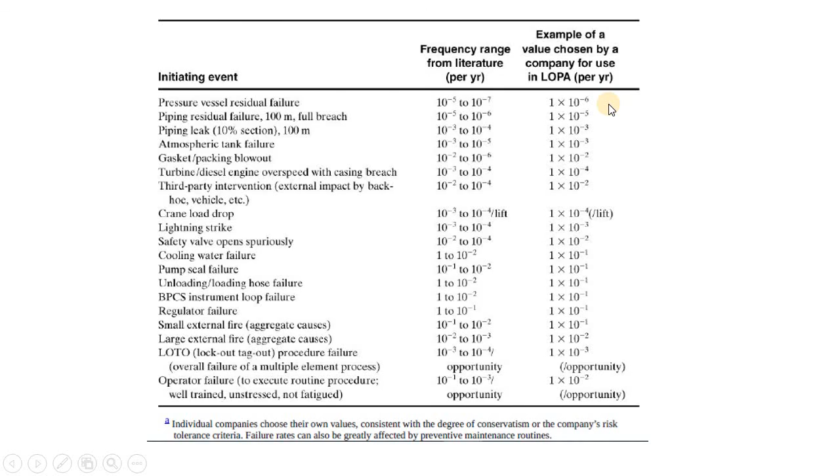These are the actions we talked about - we can use a dike, a drainage system, an open vent relief, and these are what they call the passive protection layers. I forgot what the I is for - we're going to look at that in a moment. So you're going to try to have this passive layer take action. I think it's the inspection passive layers or something like that.

And these are the probabilities for failure on demand. It's called PFD - I know it's not the plug flow diagram, something different here. We have PFDs, the probability of failure on demand, for passive inspection protective layers. So what do we have here? These are the comments that we have for passive IPLs.

Reduce the frequency of large consequences - so don't have a widespread spill, because the dike will overfill and not cover all of that. If you have a drainage system, it reduces the frequency of large consequences from spilling by itself, or spilling from a tank overfill that this drainage system will not handle. Or open vent, which prevents pressure buildup - but we should be careful that this open vent should also be able to withstand overpressure.

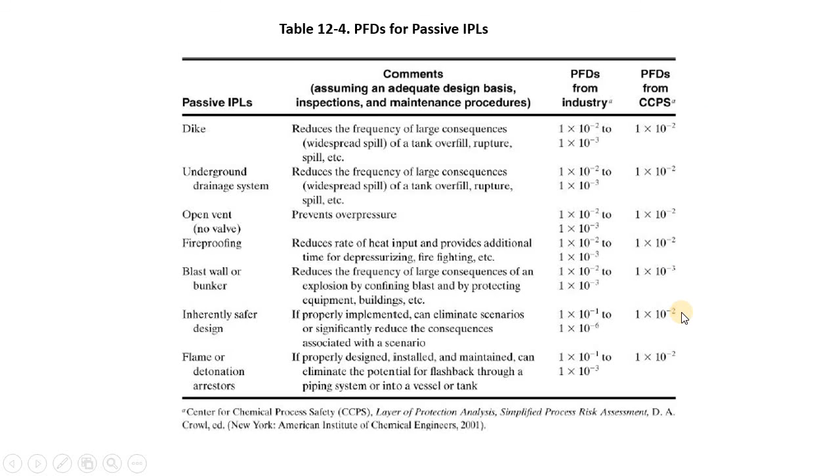So just to go to the concept of the PFD, it is used when designing emergency shutdown systems, sometimes called safety instrumented functions, SIFs. We want to achieve low probability of any failure on demand, okay? And why? How do we do this?

We can do it through many things. We already mentioned many IPLs, but we can do this by having redundant sensors. By the way, when you put redundant sensors and redundant control elements, you will have AND gates, and you're going to see that your reliability is going to be high through your calculations.

Using multiple sensors, testing the components at specific intervals to reduce the probability of failures. So it's redundant, using more than one sensor. If one sensor doesn't work, the other works. You're testing them just to make sure that they are working, right?

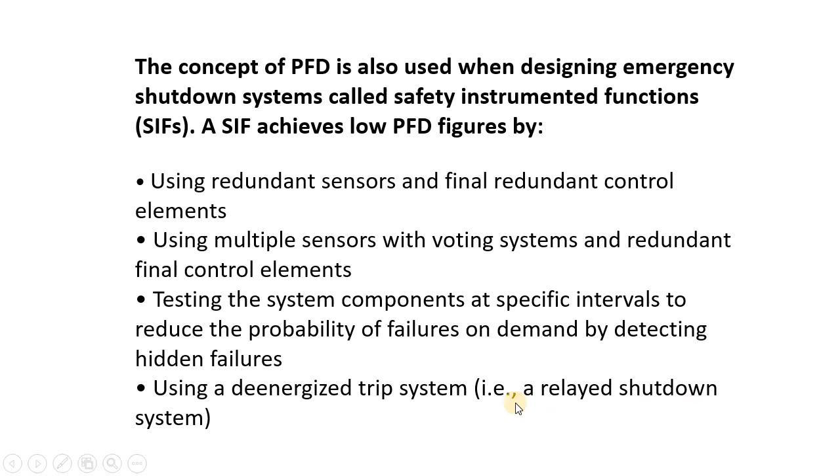Because if you don't test them, for example you have a redundant sensor that you did not put on for 2 years, now it's not working. So when you're trying to use it, it doesn't work. So you need to test, right? You need to test. And of course, sometimes you also need to test a shutdown system just to make sure that it's working as well.

So there are 3 safety integrity levels that are accepted in chemical process for an emergency shutdown system. This is one integrity level, that's another one, another safety integrity level. What are they? These are normally implemented with a single sensor, a single logic solver, and a single final control element, and they require periodic proof testing to know that all of them will work.

A second layer, of course, you will expect that you have redundancy - fully redundant, including sensor, logic solver, and the final control element, and of course needs some testing. What is the third layer? The third layer is typically fully redundant, and the system requires careful design and frequent validation tests. So it is redundant and it has testing as well.

So the first one, no redundancy, only testing. The second one has redundancy. The third one has redundancy and testing.

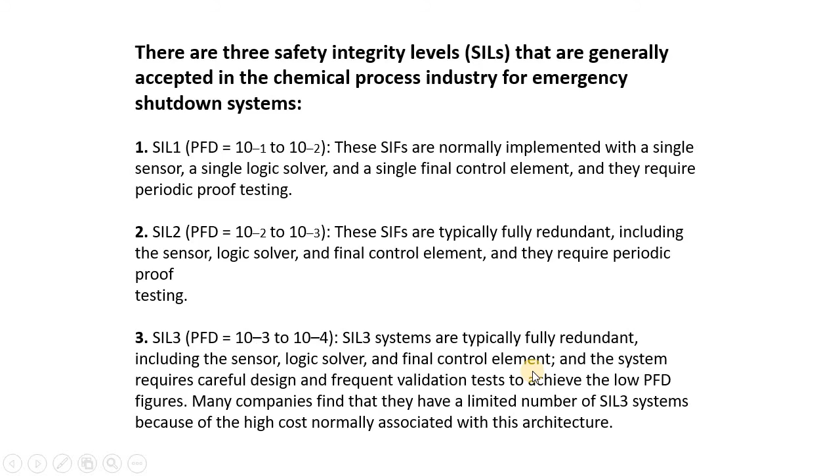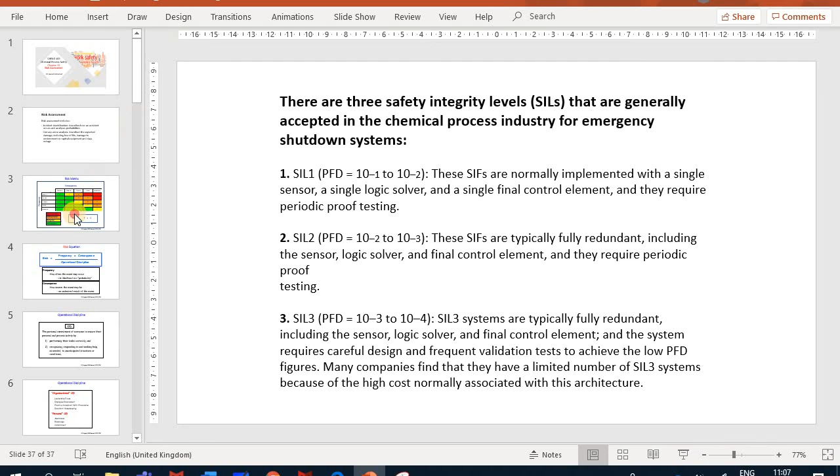So that's the whole part that we have for risk assessment, and I think you had a good idea of the risks. So those were the risks where we calculate if it has a high risk, if it has high frequency, or if it has a high risk if it is dangerous.

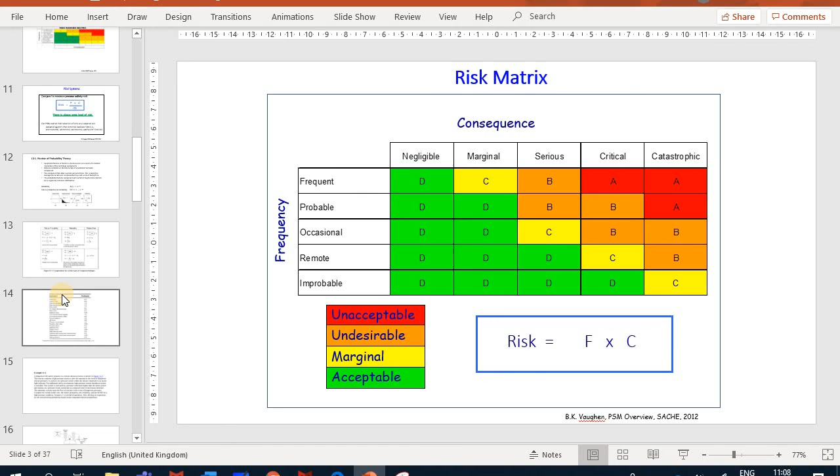And then we talked about the probability theory where we calculate the failure rate, and based on the failure rate we calculate the reliability, and the probability of failure is just 1 minus the reliability, and we have taken an example for that. And later we went through the event trees, where event trees are more like an inductive process.

And what we meant by inductive, that means we have the failure that we have here, and we are looking at the action. So we're going inside rather than going outside, right? We are going inside. We are not seeing what caused it.

This is the deductive, this is where the fault tree analysis comes from. The fault tree analysis goes from here. It says, what caused this increase, what caused this cooling to stop, this cooling flow rate to stop?

So you do your tree here, okay? You do your tree here, putting the AND and OR gates and so on, right? And this is what you're going to do. That's the fault tree analysis. So that is the fault tree analysis.

Now for the event tree: if this cooling rate or flow rate stops, what should I do? If this person successfully takes an action, we go up. If he doesn't take an action, this is the failure rate. And then if the operator did not restart the cooling, going up. If he did not restart the cooling, going down. So this is like inductive, going inside it and taking action.

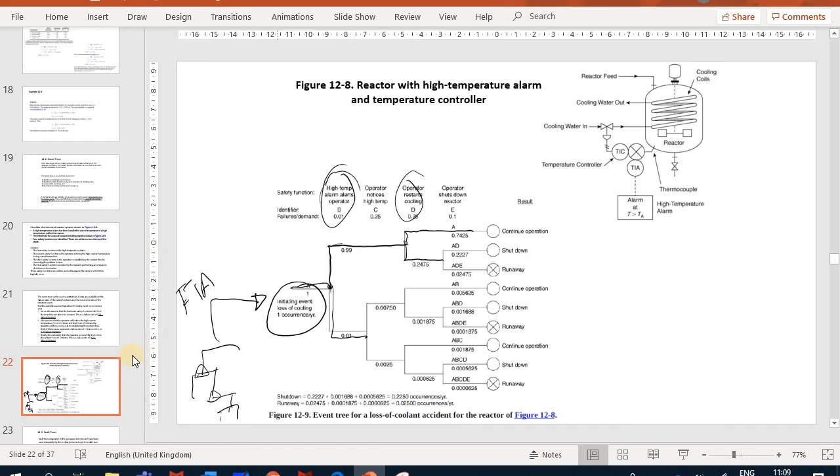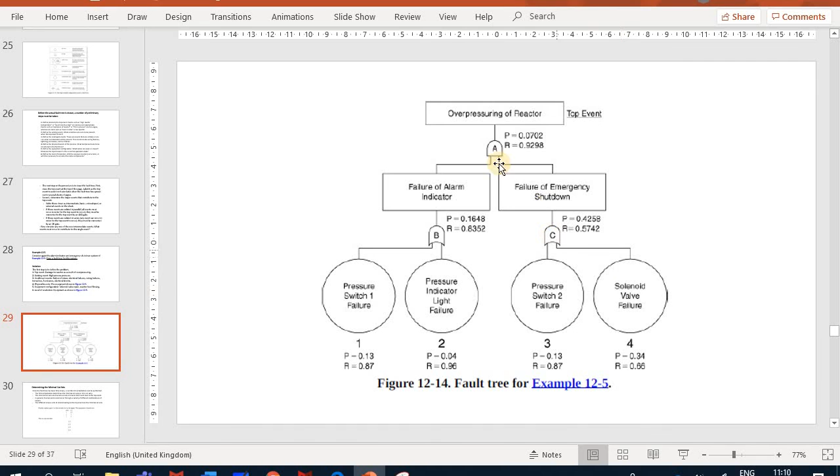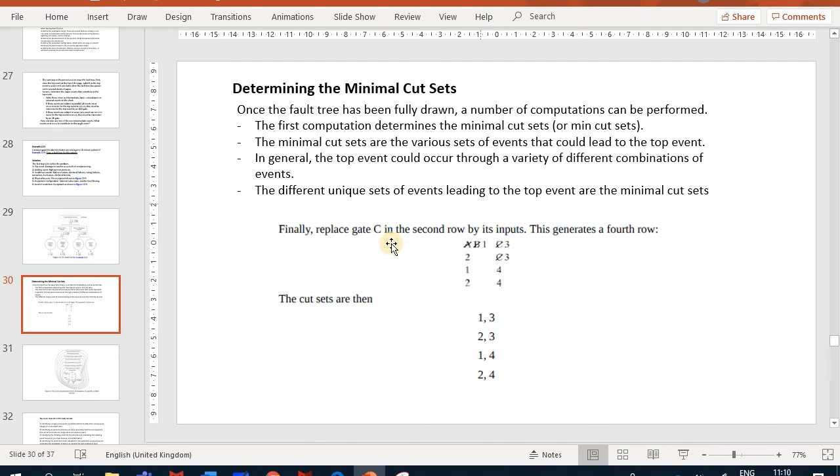So that was the fault tree analysis, and we went through that and did some calculations. And that was the event tree. The fault tree analysis was that part here, and we said we will know how to draw it and have an idea about it, but we will not go through the details of doing the calculations to get the minimal cut sets, because sometimes it's a bit confusing how to get these minimal cut sets, and this is done through computers, so don't worry about it now.

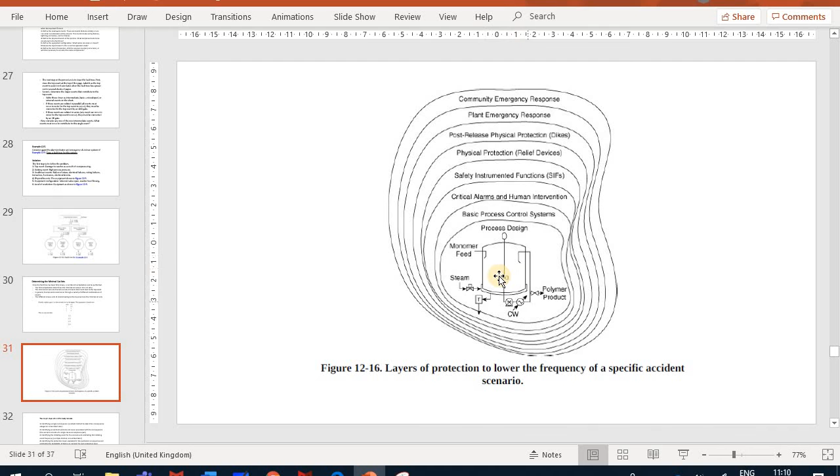And then we need, of course, to have a good risk assessment. We need to consider all layers from the process design till we get to the people who are sitting in the neighborhood of this industry, and we went through the details of that. So that's all for chapter number 12.